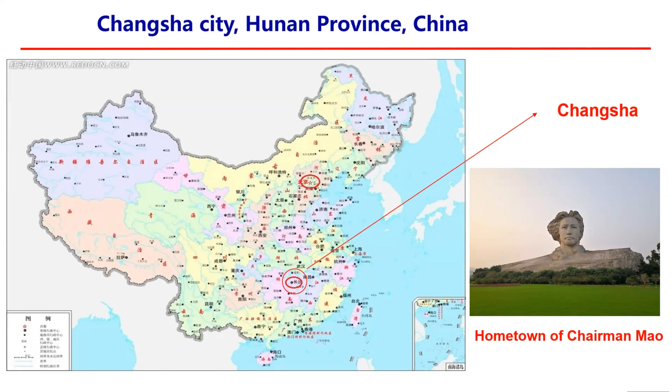I'll give you some quick idea about where I'm from—Changsha and Hunan University. With the direct high-speed train, it's less than 3 hours, so it's very easy to get there. I think some of you have visited Hunan University, and some of my students are here as well.

Hunan University dates back to 976 AD, when the Yuelu Academy was founded. This year we are celebrating the 1050th anniversary of the academy. We have 30 colleges and departments, and one graduate school, with almost 40,000 students now, including 21,000 undergraduate students.

It depends who ranks it, but this year U.S. News ranks Hunan University as number 11 in China and number 19 globally. I think City University of Hong Kong ranks like 60 or 70 or something like that, right?

Then coming to civil engineering, we celebrated the 120th anniversary a few years ago. Several rankings have placed civil engineering at top 5 in China, and we have 10 departments, including one department of building materials.

This is also the ranking from an organization in China that ranks us number 6 in the world and number 5 in China. So you can see we do have a very good research program there.

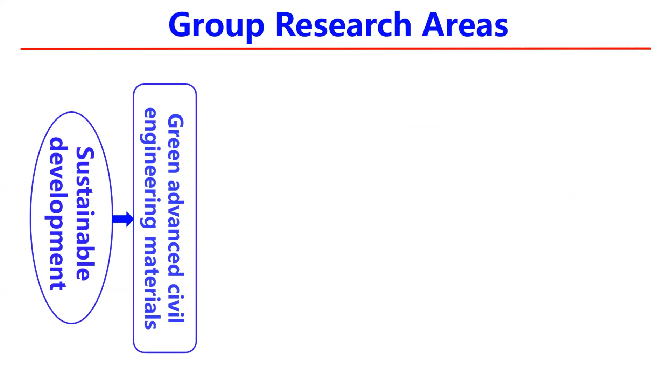For my research group, we mainly focus on 4 areas: how to enhance the performance and also endow functions for civil engineering materials, and also try to develop low environmental load construction materials. Finally, we mainly work with other areas like structure, geotech, or even building physics on how to apply or develop the materials.

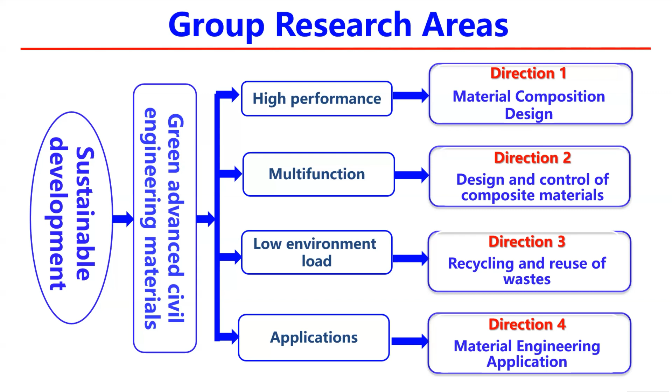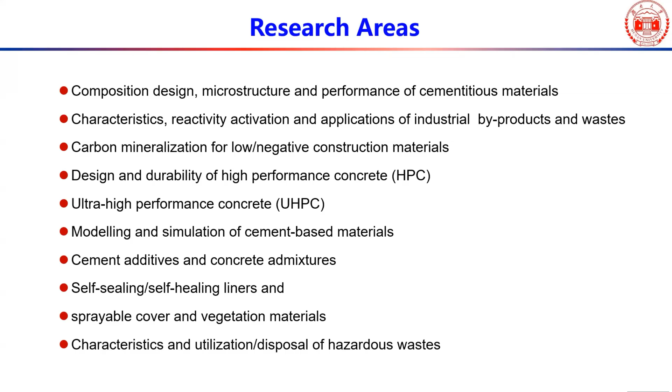This is the research area we are mainly working on currently, including the design, microstructure, and performance of cementitious materials; how to use byproduct waste materials; carbon mineralization; HPC and UHPC; modeling and simulation; cement and concrete admixtures; and self-healing, self-sealing liners, etc. Basically, we cover from organic to inorganic, from micro to macro level, from chemistry to mechanics, and from materials to structure.

Mainly we have been working on several areas. One is the design of high performance or ultra-high performance concrete with multiple performance targets.

Before, when people designed concrete, usually they would read the literature or previous reports, pick a few basic mixtures, and try to optimize or modify them. But on the other hand, if you change some composition or parameters, the mixture will not work. After I moved back from Canada and the US to China, I started to be in charge of one project for the Changsha subway, and I was appointed to be responsible for raw material selection and concrete design for the subway system. So then, should we consider all these requirements or performance targets during the mixture design?

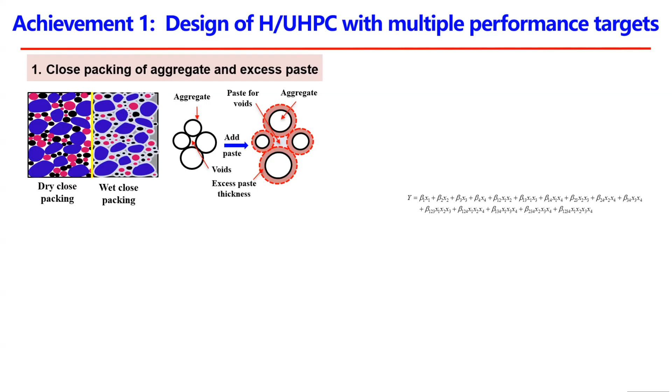So then I started to think about it and came up with this new approach. First, we should try to use closer packing of aggregates, because the majority of deformation or durability problems are caused by cement paste. So we should try to use less cement and have close packing of aggregates. Then, in order to lubricate the aggregates to achieve certain workability or rheology, we have to have some excessive cement paste.

Second, then we come to the binder composition. Before, people just seemed to choose them randomly or based on literature. Here we propose to use factorial design. For example, if the binder consists of four components like cement, fly ash, silica fume, and slag, using this approach we could establish the mathematical relationship between the properties or quantitative microstructure parameters - basically anything that can be quantitatively described - with the composition of the binder.

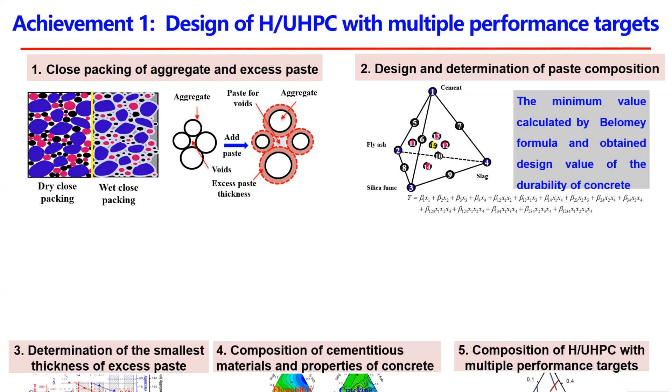Third, based on determining the binder composition and your workability requirement, we try to use chemical admixture to adjust its rheology or workability. Before, if the workability or slump wasn't good enough, people would add more water or change the sand to cement ratio - that's not really a scientific way. Now chemical admixture is well advanced and developed, so we can use superplasticizer to increase workability or reduce water demand, or VMA, viscosity modifying agent, to change its viscosity.

So I'll give you five ternary diagrams here. Because if we have four compositions, you get a contour plane, not a curve. In the majority of cases, we usually use cement, slag, and fly ash, so here I use the ternary diagram as an example. You can see we get the ternary diagram for compressive strength, for workability, for carbonation resistance, for shrinkage, or for alkali reaction expansion, whatever you have.

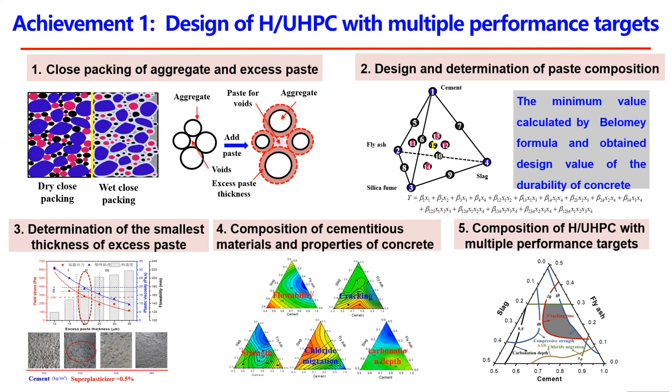So then we stack all these figures, or you can even plot the cost, within the triangle. Then we stack the five triangles together, and you can see gray shadow areas. These gray shadow areas give you the performance or property requirements that meet all the specified numbers. So that's the approach I developed.

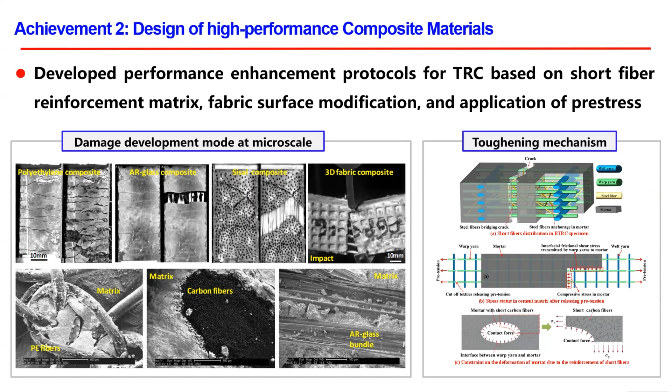We're also working on designing high performance composite materials, and Professor G is mainly working on TRC-based, reinforced cementitious material. Our third area is efficient use of waste material, including carbon mineralization.

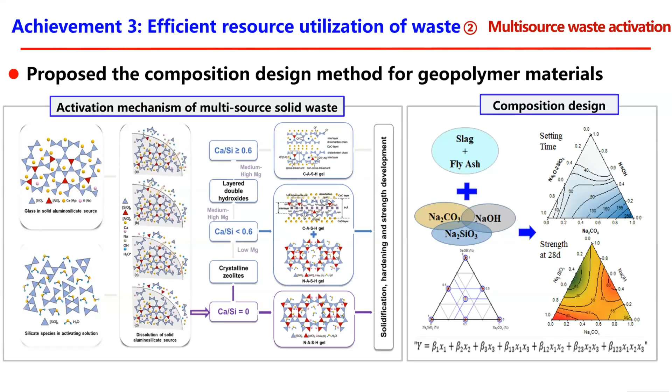I'll talk more detail later, and also the activation of solid waste material. Actually, here in the laboratory we found the relationship between the calcium to silica ratio and the formation of either C-A-S-H or N-A-S-H. We also use chemical activators like sodium carbonate, sodium hydroxide, and sodium silicate to regulate the setting and property development of alkali-activated material. So that's a topic we have been working on.

We have been using our research achievements in applications or construction like the Changsha subway system and also several bridges. I want to mention especially the Thang Long Bridge in Hanoi, Vietnam. They sent delegations to our university several times to learn how to design UHPC and also how to construct the UHPC overlay system. That bridge before carried almost 50% of transportation in and out of Hanoi.

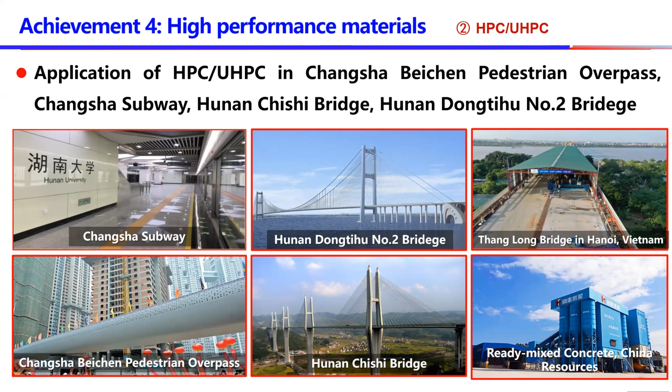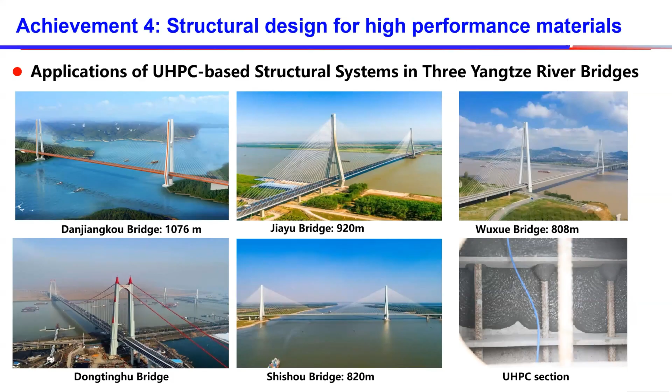We also use this approach for ready-mix concrete companies to help them design concrete mixtures with better performance but even lower cost. As for UHPC, you've probably read some reports - Hunan University has been involved with more than 200 UHPC bridges in China and overseas now.

That's it. We have published over 1,000 papers with more than 90,000 citations, not 80,000. We are also publishing a lot of textbooks and technical books in the materials area.

We have organized 4 international courses with RILEM and also 2 online public courses on civil engineering materials progress and testing methods. We have had over 500,000 audience from all over the world. Probably some of you here also have listened to our online courses.

We have also launched and organized five series of international conferences and two series of domestic conferences on different subjects.

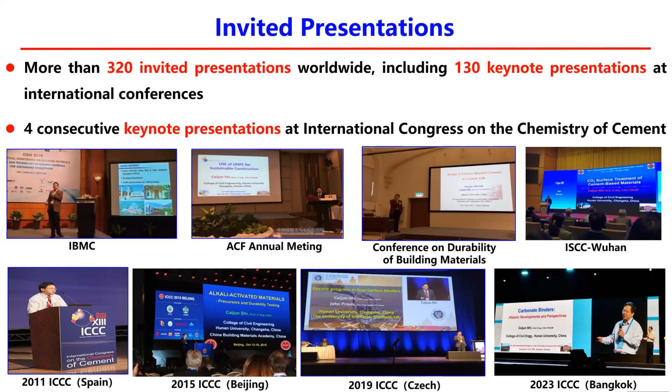We have given a lot of talks all over the world, especially in the cement and concrete area. There is a very famous and the largest conference called the International Congress on the Chemistry of Cement, and I have been invited to give four consecutive keynote lectures. The next one will be in New Delhi, India, and I'm currently preparing the fifth keynote presentation for the Congress.

We also launched a journal for sustainable cement-based materials in 2012, and it has an impact factor of 4.2. It's a traditional journal, so no fee at all. Our rejection rate is about 80 to 95%. So we welcome high quality manuscripts.

Now let me get back to the technical topic, about carbon mineralization.

I would also like to mention our book just released, Carbon Mineralization for Construction Materials and Products, published by CRC Press. If you're interested, you can buy one from the internet. I think this is the first written book of its kind. I was involved in editing two books before, launched by Fernando from Portugal.

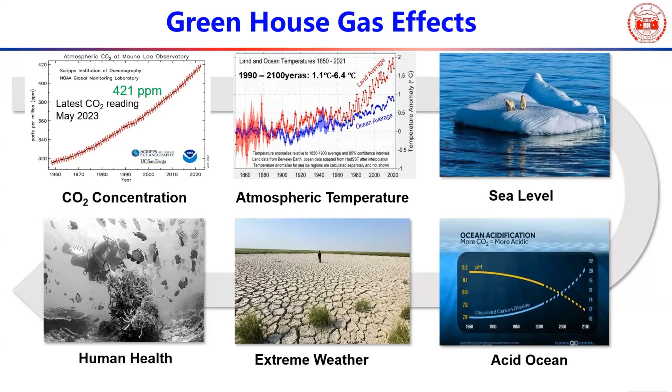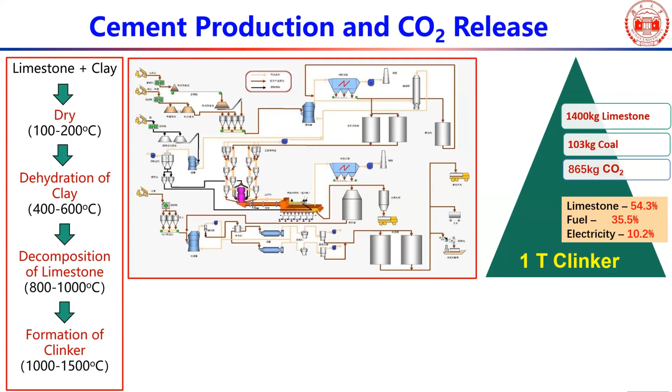So you can see it involves very high temperature, and during the production, it consumes about 1.4 tons of limestone and 100 kilos of coal per ton of clinker, and releases about 860 kilos of CO2 for an advanced conventional cement production line. But now people are trying to use more alternative fuels or waste materials to replace limestone or other raw materials, so the release amount will be less.

If we look at the process in a very simple way, it's mainly due to the reaction between calcium carbonate and silica to form dicalcium silicate plus released CO2, and then dicalcium silicate plus calcium carbonate forming tricalcium silicate and releasing carbon dioxide. Those reactions happen mainly between 1,200 to 1,500 degrees C.

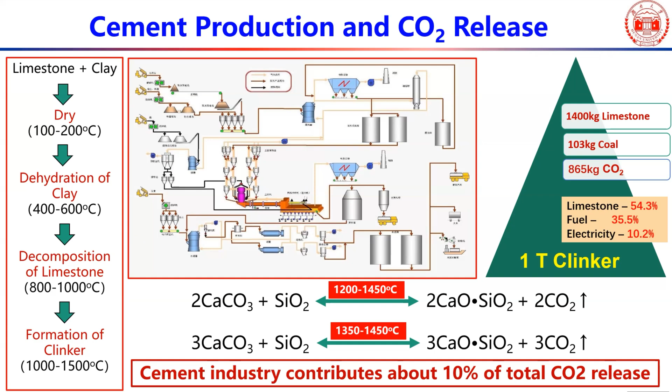Chemically and thermodynamically, the opposite reactions can happen very easily at room temperature and can even release a lot of heat. All conventional concrete is basically made by mixing cement with water to get hardened concrete. So basically we should try to use the reverse of cement production to consume carbon dioxide and get limestone.

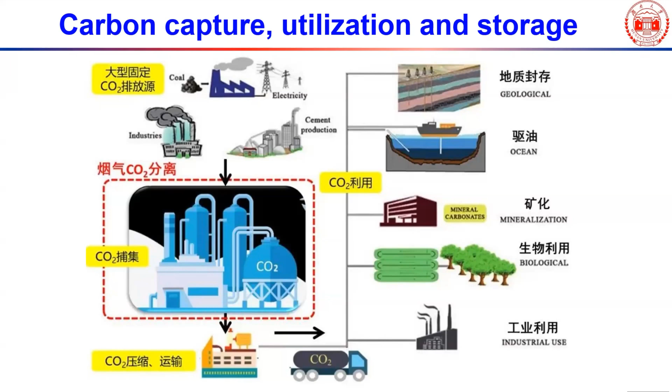I did some information search, and even for a city like Shanghai, it used about 200 or 300,000 tons of CO2 per year. So you can see the industrial or commercial use for CO2 is very, very limited.

As for this topic, at the 15th International Congress on the Chemistry of Cement, held in Prague, I was invited to be in charge of the topic on low carbon binder materials. It covers three topics: alkali activated material, carbonate binder, and belite based binder. I invited a professor to write the part on alkali activated material, and I wrote the carbonate binder part and gave the presentation there.

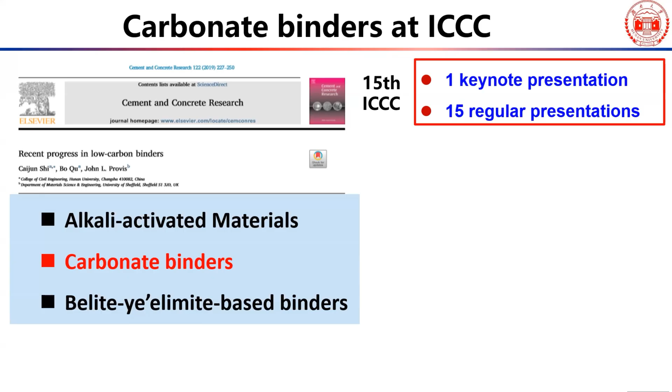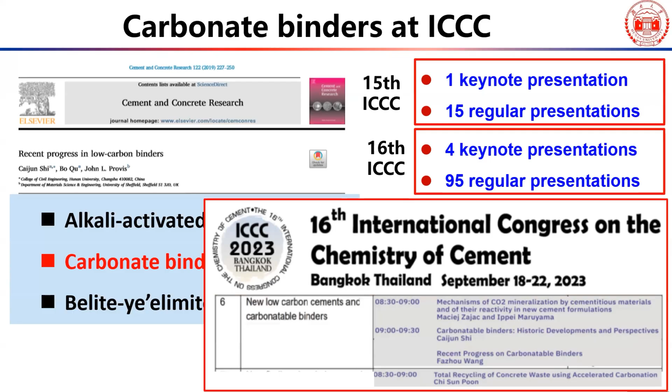At that time, there was only one keynote presentation and 15 regular presentations related to carbon mineralization. But on the other hand, in 2023 at the 16th International Congress on the Chemistry of Cement held in Bangkok, Thailand, there were 4 keynote presentations and 95 out of 500 presentations related to carbon mineralization. So you can see this is really a hot topic in cement and concrete materials area.

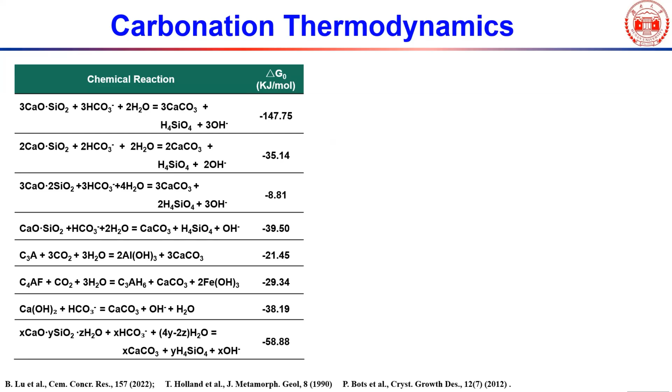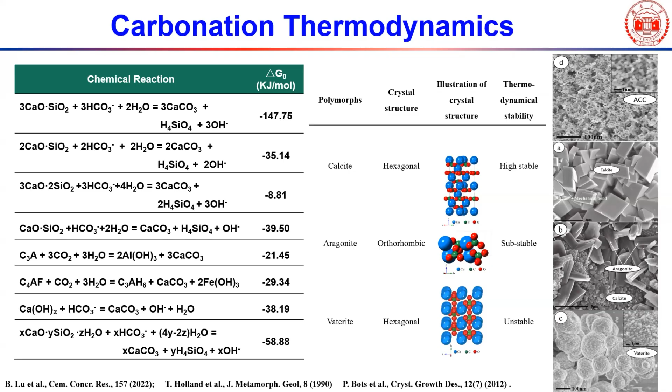When we did some thermodynamic calculation, you can see tricalcium silicate, dicalcium silicate, monocalcium silicate, tricalcium aluminate, and all those hydrated or non-hydrated calcium silicates can be carbonated automatically. During carbonation, we can get four polymorphs of calcium carbonate: amorphous, cubic calcite and prism, aragonite, and also spherical vaterite.

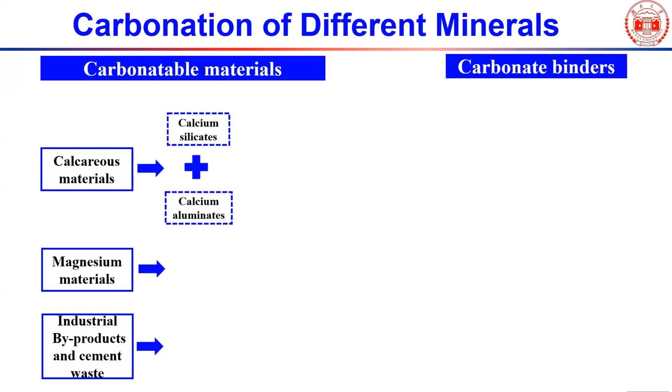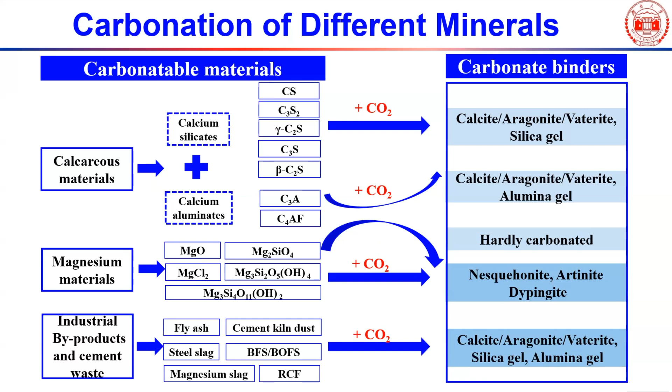So if we divide all those carbonatable raw materials, basically they are calcareous materials: calcium silicates and calcium aluminates, then magnesium-based materials, and also industrial byproducts and waste materials. Basically all of them can be thermodynamically carbonated and then mainly form calcite, aragonite, or vaterite plus silica gel.

Let's look first at how carbon dioxide can react with calcium oxide and calcium hydroxide. Thermodynamically, even under dry conditions, the Gibbs energy for both the carbonation of calcium oxide and calcium hydroxide is very negative, meaning this can happen very easily. But on the other hand, their reaction rate under dry conditions is extremely low.

One other good example is what we see every day: window glass. It's a glassy material, and thermodynamically it's also unstable. But even after hundreds of years, it's not converted to silica. So it's the same like this.

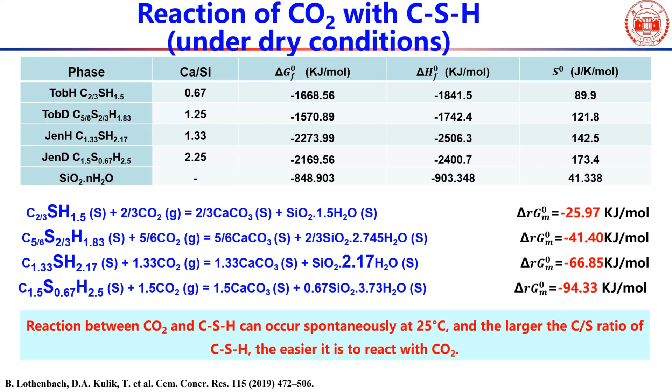And so for those calcium silicate hydrates, you can see their free Gibbs energy is almost between minus 26 to almost minus 95 kilojoules per mole, so they're also very negative. But on the other hand, in dry conditions, they also carbonate very slowly. So this means moisture, or a certain amount of water, is very important, even critical, for fast carbonation or carbon mineralization.

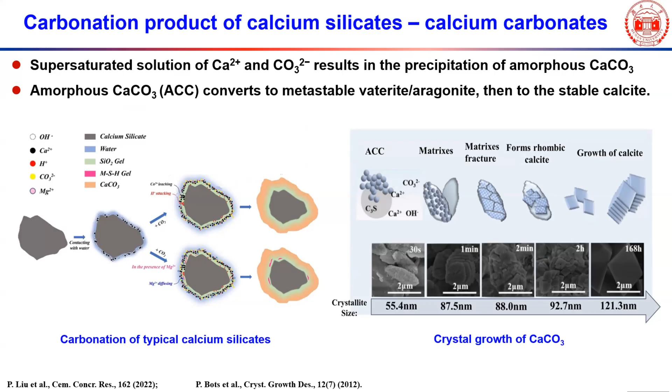Also, even a supersaturated solution of calcium hydroxide, where calcium reacts with carbonate ion, results in the precipitation of amorphous calcium carbonate, even in the presence of moisture. So initially it will form amorphous calcium carbonate, and then with time, the crystal sizes of calcium carbonate start to grow.

As I mentioned earlier, calcium carbonate has three polymorphs. When crystallized, it has cubic forms. If you look at the density, calcite is about 2710, aragonite is 2930, and vaterite is about 2540. So they have very different polymorphs and also different densities.

During their formation, this will significantly affect the properties of the final carbon mineralized product, because the cubic calcium carbonate could have high compressive strength, but on the other hand it's very brittle, just like marble we've seen. Aragonite has a needle structure, and a typical example is seashell, which consists mainly of aragonite, so it also has very good flexural strength and ductility.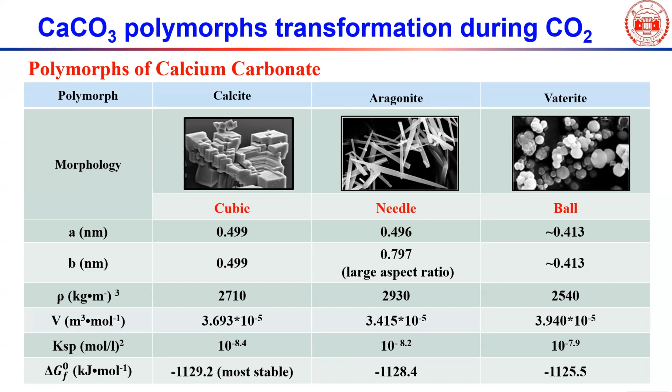Vaterite is very unstable, but on the other hand it has a ball structure, and it may improve the workability of concrete. Especially, it has low density and may increase the compactness, or lower the porosity, of the concrete material.

So how can we really control the formation of different calcium carbonate forms? First, thermodynamically, we established a model, and then tried adding different additives or changing the environment to get different polymorphs of calcium carbonate.

We found that when we add inorganic additives such as metal divalent ions like magnesium and zinc, they can control the formation of calcium carbonate by changing the solubility or crystallization habits of calcium carbonate. We also tried organic additives such as MEA, EDTA, and PAA. They can control the formation by selective adsorption, changing the surface energy to get different polymorphs.

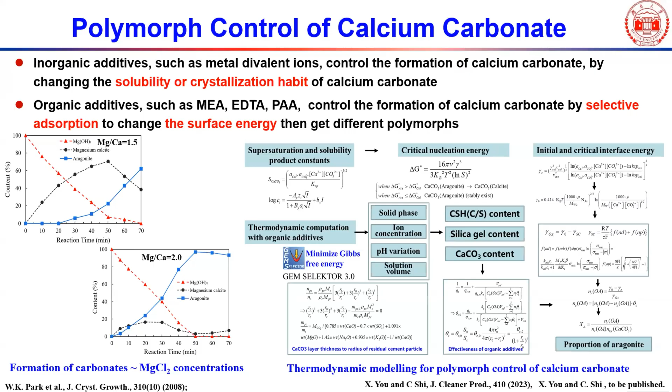So those thermodynamics can really help or guide our research to achieve different results. This is a comparison between our model and published result data, and you can see for magnesium chloride concentration, our model fits the experimental results very well.

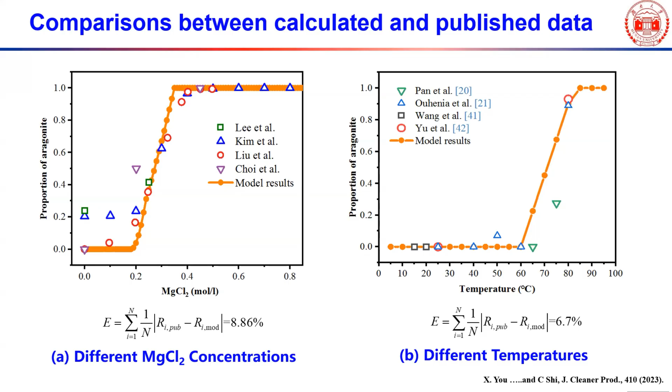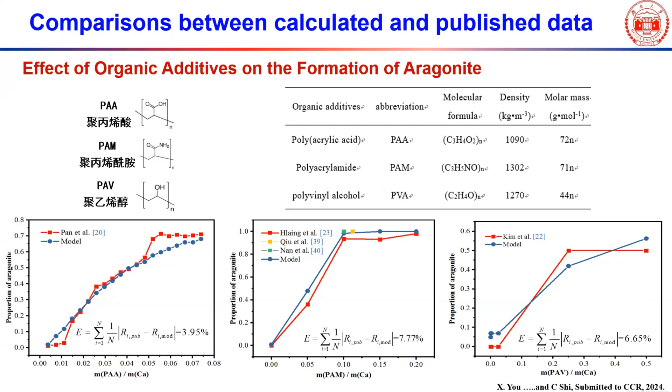As for temperature, you can see from 60 to 80 degrees C, aragonite starts to form, and when it's over 90 degrees C, you will mainly get aragonite instead of calcite. And when we use different organic additives such as PAA, PAM, and PAV, you can see our model also fits the experimental results very well.

We also tried to understand the carbon mineralization of magnesium silicates. Quite a lot of work has been done and published by geologic researchers. Initially, they tried to mineralize carbon through the reaction between carbon and olivine, and also other materials like basalt. But on the other hand, mineralization using those materials requires very high pressure and very high temperature.

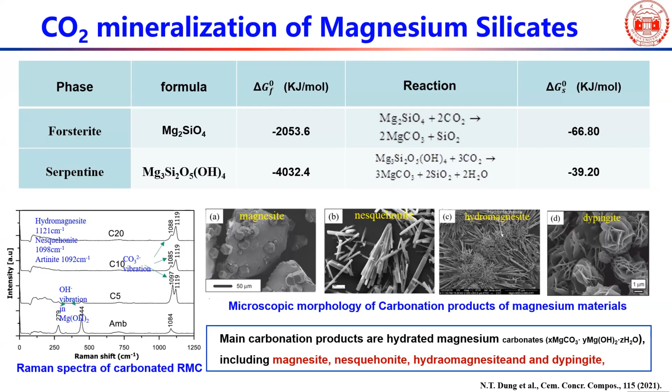There are some processes that can basically convert magnesium silicates to magnesium oxide, so then they can be carbonated very quickly. Magnesium silicate and magnesium silicate hydrate also have very negative free energy for carbonation, but on the other hand, they cannot easily be carbonated at room temperature.

Now let's also look at the historic development of carbon mineralization technology. When I started this project in 2002-2003, I did a patent search, and found that even in 1870 and 1872, the first two patents were granted to James Rowland, who tried to use carbon dioxide to accelerate the setting and hardening of concrete blocks and other products.

Then I did more detailed research, and found that in 1972, some researchers at UIUC did some carbonation work with calcium silicates, including tricalcium silicate, beta dicalcium silicate, and also gamma dicalcium silicate.

But they did not try to produce any products. Then in the 90s, quite a few companies in Europe tried to use carbon mineralization technology to accelerate the hardening of cement particleboard. But at that time, chemical admixtures were not well developed, so producing cement particleboard needed a long time for setting and also large space for initial curing and stockpile. On the other hand, they found that although the surface of concrete can react with CO2 very quickly, the reactions happen mainly at the surface and cannot go inside.

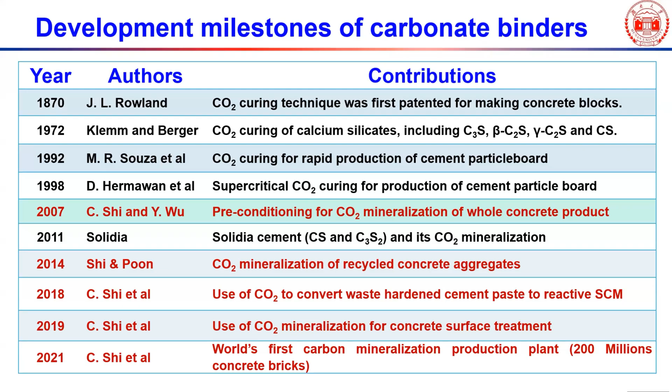Now let's have a look at carbon mineralization of basically calcium-based material. This is our concrete mixing: basically cement, aggregates, supplementary cementitious material, water, and a chemical admixture.

Mainly we can see two types of concrete. One is highly flowable concrete for either ready mix or in-situ casting products, like the top picture. The other one is dry mixture, mainly for masonry bricks, blocks, and also some other products like paving stone. Initially when I started working on this project, I thought, well, block looks very porous and rough, so I thought CO2 can go inside very easily, but actually it doesn't.

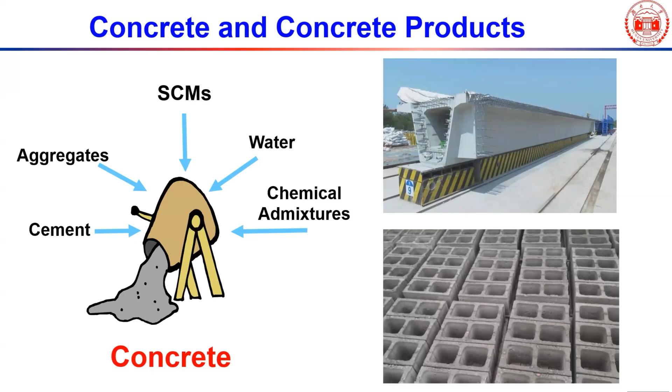In order to get the whole piece compacted, products have to use proper water-to-cement ratio and compaction pressure to ensure all the voids within the product are filled with water. Only then can you get a whole piece of product, otherwise it will fall apart. So in that case, CO2 can still not go inside.

So after the molding or compaction, how can we really remove the moisture in those capillary pores? Because without moisture, it's a very porous mixture, so in that way we can let CO2 go inside very quickly.

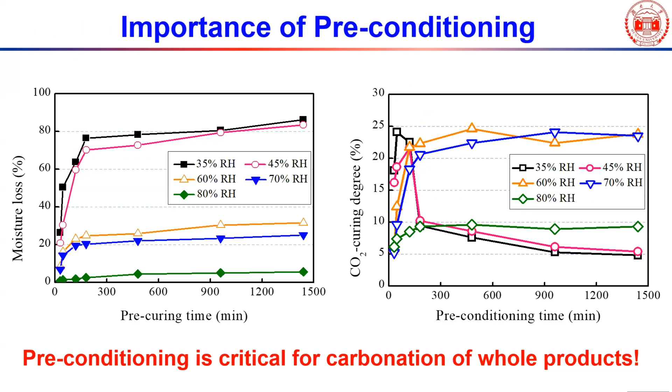Because if you really measure the carbonation degree within 15 minutes, the carbonation degree is also relatively not that high.

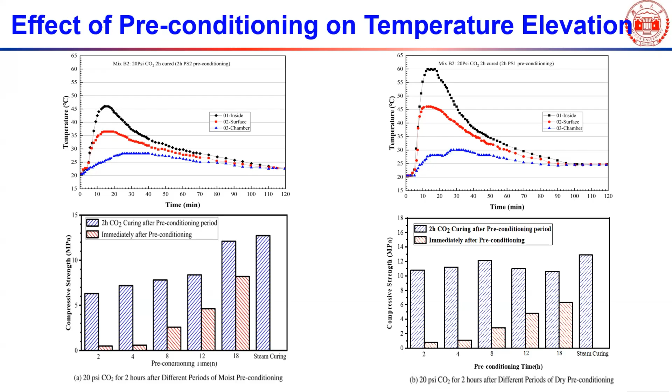So you can see preconditioning is very critical to reach high strength and also high carbon mineralization degree. One thing here, I haven't published this result yet, but as I said earlier, in our experiment, we found removing about 20% of moisture gives the best results.

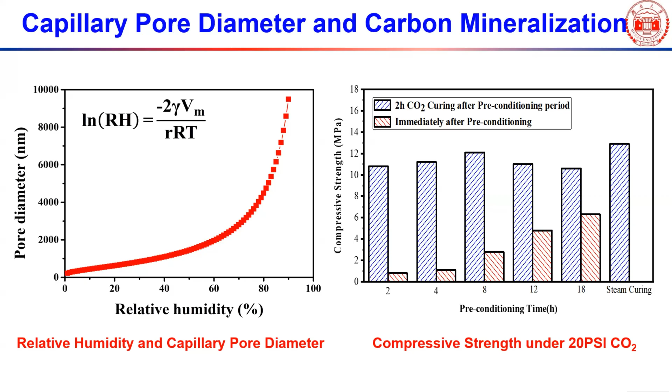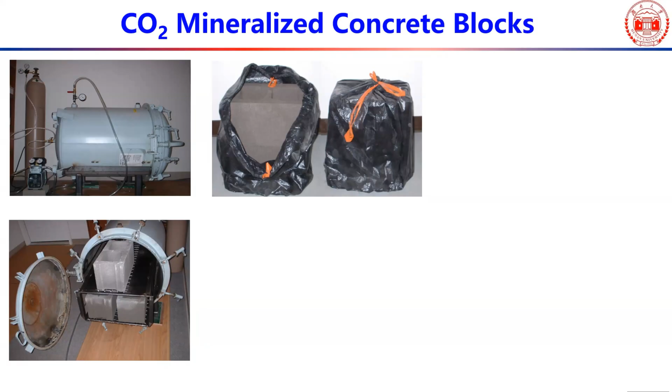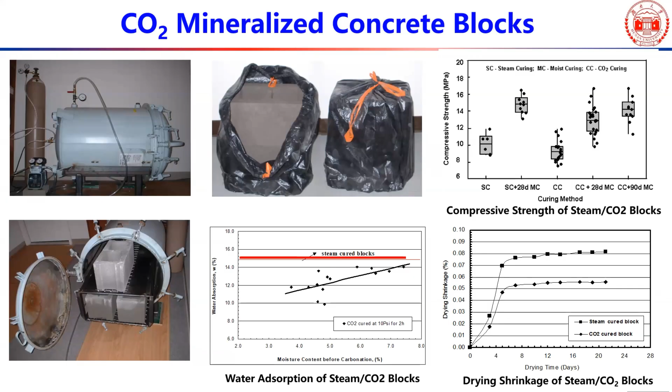But on the other hand, if we look at the drying shrinkage - this is steam cured, and this is carbon mineralized block - you can see carbon mineralized block gives lower shrinkage than the steam cured blocks.

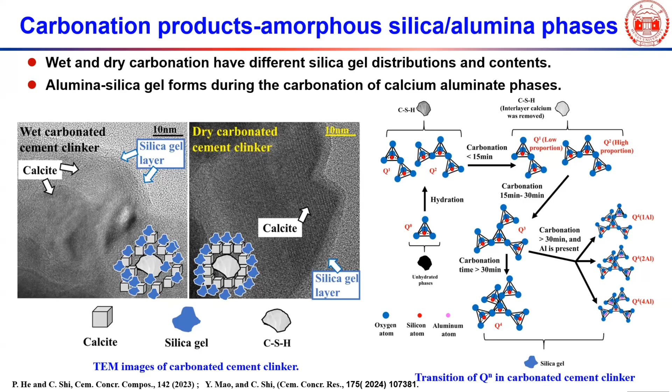So you can see here, in cement clinker you mainly have mono silica gel, basically Q0, Q1, but then after initial carbonation you will get some Q2, Q3, and as the carbonation time increases, you will get a much more polymerized silica gel. This is why I said it's very important for later on, how are we going to use this carbon mineralized product.

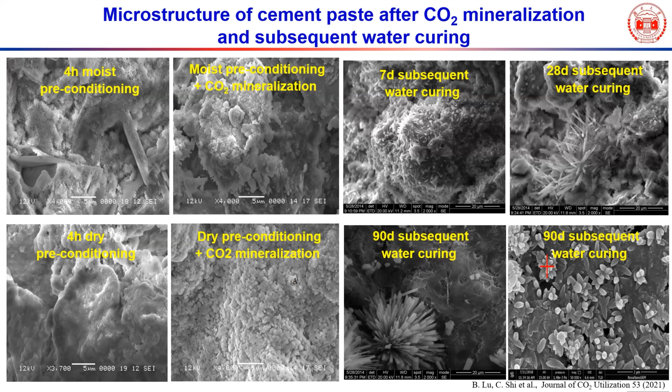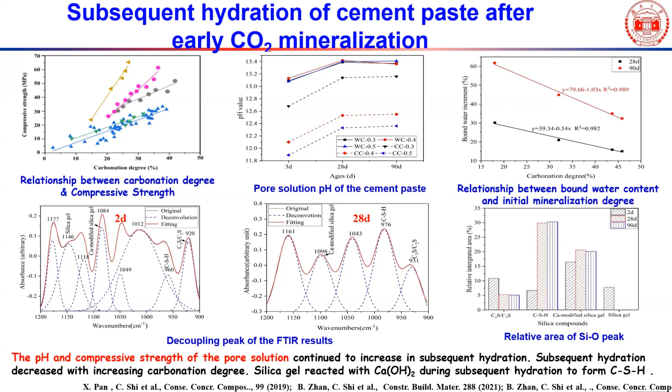On the other hand, after carbon mineralization, initially we can find silica gel forming, but as we immerse the specimen in water, the silica gel later disappears. This is because cement hydration releases calcium hydroxide, which reacts with the silica gel to form calcium silicate hydrate, similar to conventional portland cement.

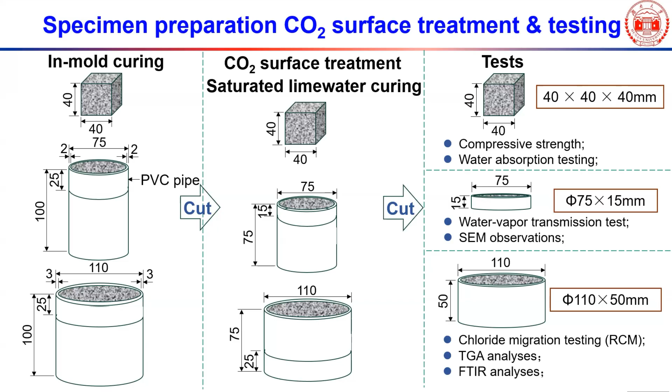I also want to show results on how we use carbonation for surface treatment of concrete products. We cast cubes and cylinders, then used CO2 surface treatment, followed by strength testing, water absorption testing, and chloride migration testing.

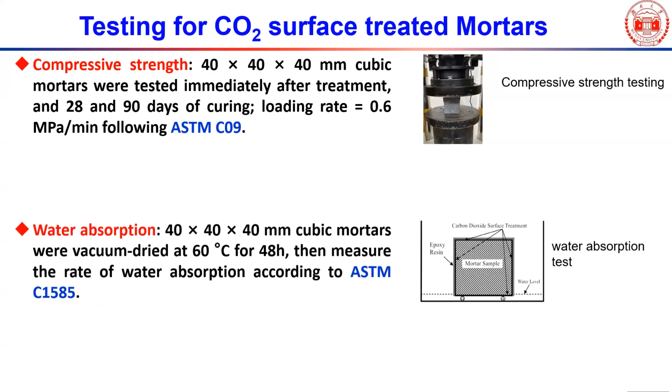Strength testing followed ASTM C109, water absorption testing followed ASTM C1585, and we also did water vapor transmission tests. These figures show quite a lot of interesting results.

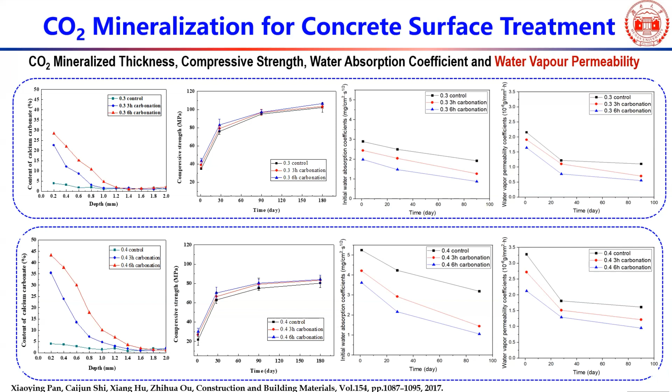The next one, water vapor permeability, also shows similar results. And this is the cylinder we used for the chloride migration coefficient test. You can see that after 6 hours of carbonation, the chloride migration coefficient decreases more than 50%.

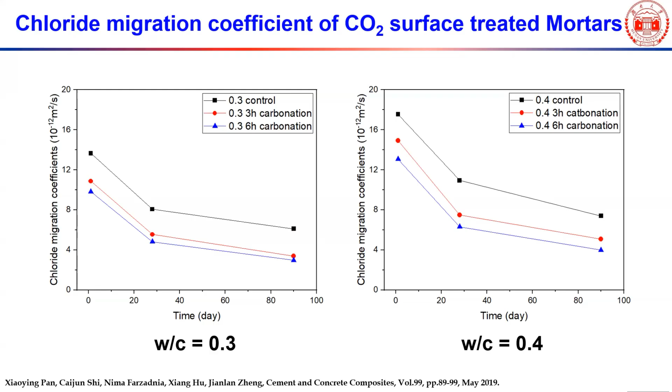This means initial surface carbonation is a really excellent method to produce an integrated impermeable surface. In many cases people use coating to coat the concrete surface. For inorganic coating, after a certain period of time it may peel off, and for organic coating it will deteriorate and also peel off. But this becomes a part of the concrete product itself, so it's very reliable for a long time.

If we combine conventional Portland cement with solid carbonation technology, we think we should use low calcium clinker, but the mineral should be beta dicalcium silicate, because beta dicalcium silicate can be carbonated very quickly and easily. On the other hand, it also has low hydration properties, because later on, after carbonation, it will continue to hydrate and enhance the property rather than like Portland cement, where once carbonation is finished it reaches a peak and starts going down.

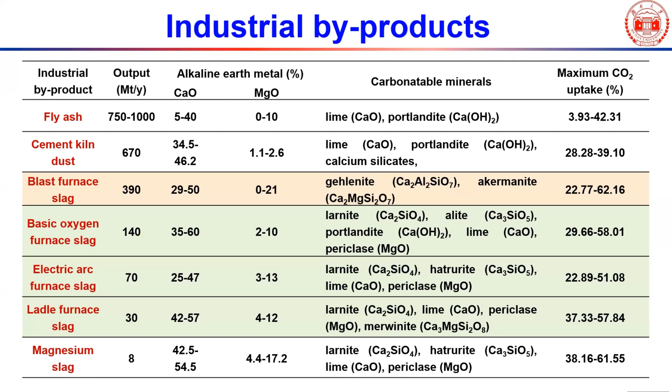Okay. Well, initially we did some work and it didn't work, so I put it aside. But recently, some paper from Tongji University, Zhengwu Jiang's group...

The first graph shows how the calcium to silica ratio affects carbon mineralization. You can see if the calcium to silica ratio is very low, the carbon uptake is also low. But if you increase the calcium to silica ratio, the carbon uptake increases.

On the other hand, those are glass materials. If you compare this calcium to silica ratio 1 glass with the bottom figure, which is actual wollastonite - a crystallized calcium to silica ratio 1 calcium silicate - you can see the carbon dioxide uptake becomes higher.

Actually, the other very interesting result is aluminum. You can see the first figure is CA0.1S, and this last figure contains more aluminum. You can see here the carbon uptake becomes very, very low.

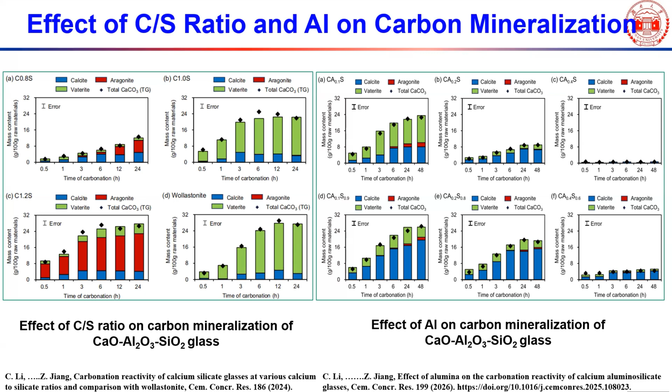Chemically, they explain that without aluminum, the slag will be uniformly dissolved, so the calcium ions can react with carbon to form calcium carbonate uniformly on the surface. But if aluminum exists, the surface cannot be uniformly dissolved, so it dissolves in big chunks, and only a small amount of calcium ions dissolve into solution to react with carbon dioxide to form calcium carbonate. But those are very rough mechanisms.

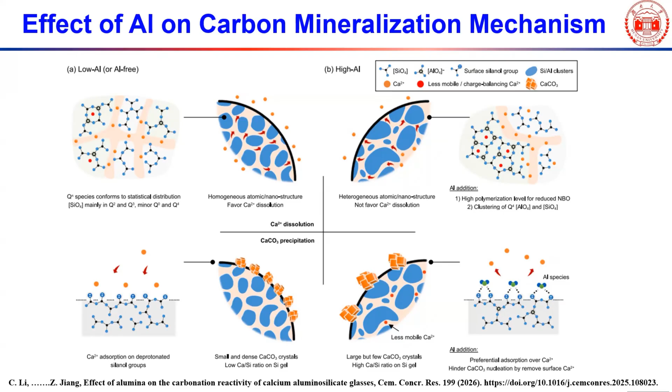I think there's still a lot of scientific study needed to really understand the mechanism here. Actually, my students also did quite a bit of work on this topic.

This is really, really interesting, and we're also working on that. I think it's a good topic to try to understand, because it involves blast furnace slag and other glassy materials - whether they can really be used for carbon mineralization purposes, or how we can improve the carbonation efficiency scientifically. Okay, so that's it.

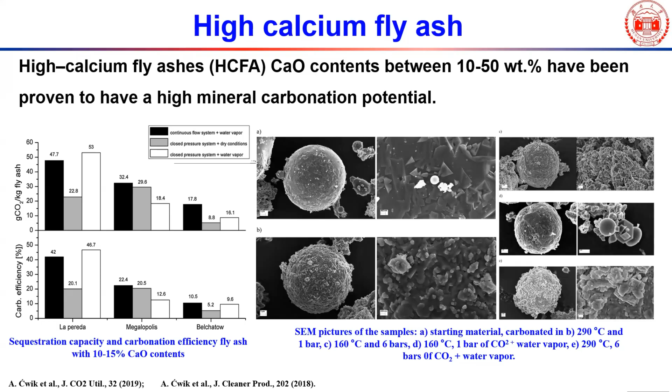The other exception is steel slag. Steel slag is not what we call slow cooled - usually they cool it by pouring the slag onto the ground, or now some Chinese companies developed a process where they pour it into a big steel pan, let it cool slowly, and spray some more water on it, so the big chunk breaks into small pieces.

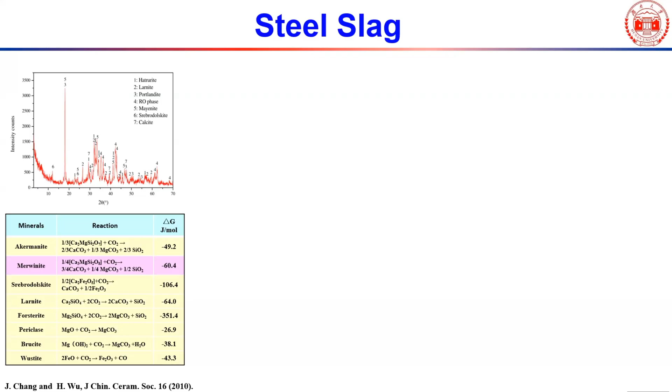Those work are from my friend Professor Caijun, who is now a professor at Hunan University. He studied how particle size, CO2 concentration, and temperature affect carbonation, and he tried to directly carbonate it to make steel slag products. You can see the strength he got is about 40 megapascal.

Recently I also have been collecting quite a bit of information, and probably later this year I will give a talk on how we can really use carbon mineralization technology efficiently. Because, let me see.

Now a lot of people try to carbonate steel slag to make lightweight aggregates. But steel slag has a density of about 3.8 or 3.9, while limestone or regular coarse aggregate has a density of about 2.6. So you'd be using such a heavy material to make lightweight aggregate.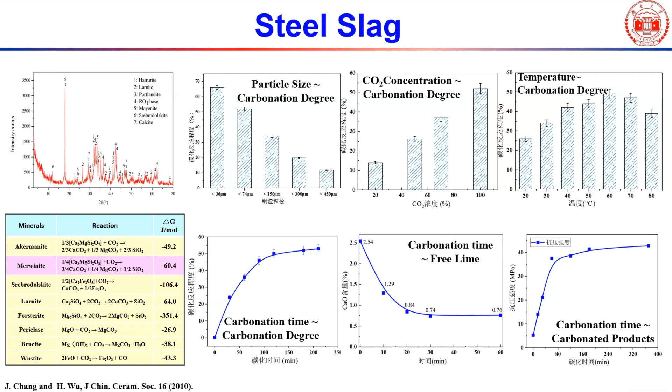One of my PhD students has been working on his thesis for 7 years. When we started working on steel slag, there were only a few papers on this topic, but now probably thousands. He got some very good results - we used some chemical admixture to enhance the carbonation, and we achieved a strength of 60 to 70 megapascals, making carbonated steel slag product directly rather than carbonating it to become a supplemental cementitious material.

So the other material is recycled concrete fine. Actually, I just recently had a PhD student graduate - now he's a postdoc at Imperial College. Within 2.5 years he published three CCR, three CCC, and several other journal papers on this topic. This project was supported by the Global Cement and Concrete Association.

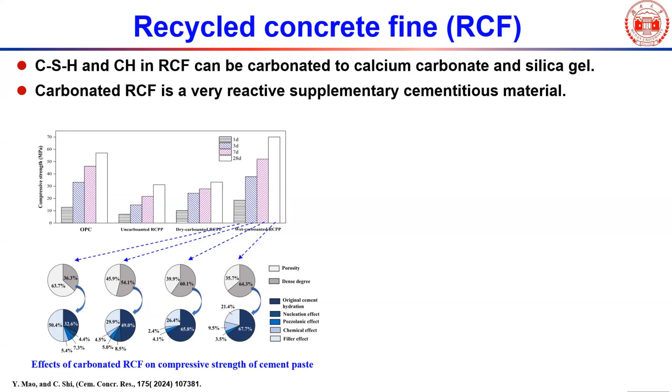Part of his interesting work is he quantitatively calculated the different effects of carbonated recycled concrete fine as a supplemental cementitious material, including the filler effect, pozzolanic effect, and a few other effects - he calculated 4 or 5 effects total, and how they contribute to strength. This was published in CCR.

The other process was actually developed by Maruyama from Tokyo University. They use a container filled with recycled concrete aggregate. They pump calcium hydroxide solution and also CO2 in here, and this carbonates the recycled aggregate.

So that's their process. Actually, we had two master students working on this - I said, why don't we just compact the recycled concrete fine to make a product directly? You can see here, after a few hours of carbonation, it reached very high strength.

And even the carbonation degree was very high. You can see here, after a couple of days of carbonation, it reached almost 70% carbonation degree and strength over 40 megapascals. That's strong enough to make a lot of construction products, right?

This paper was recently published in CCC, though I don't know why it's not showing up here - I can't see this on the screen. I think the publication information was just released, last issue.

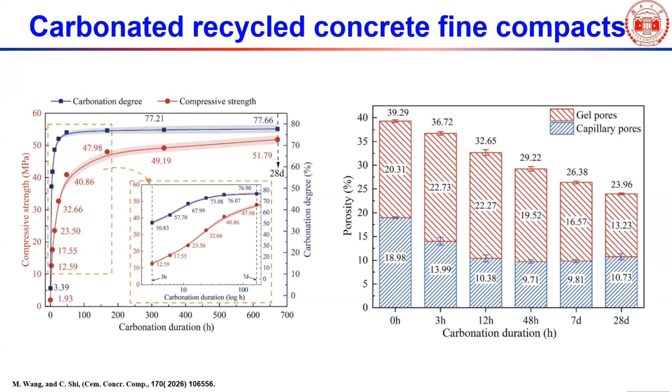So also some technology demonstration applications. For our preconditioning technology and carbon mineralization, after almost 20 years of laboratory research, we worked with Huaxin Cement Company in China. We built the world's first carbon mineralization concrete brick production line. This plant produces 200 million pieces of concrete bricks per year.

The other amazing thing is we use cement flue gas, not pure CO2, because when you capture and purify CO2, it costs about 600 or 800 RMB per ton. Here, it also can purify the flue gas - we haven't measured this precisely, but on the other hand...

We do not use any pressure - basically flue gas flows through. You can see inside there are so many bricks stockpiled, and the flue gas goes through. Definitely some particles hitting the bricks will precipitate, and that's the basic physics.

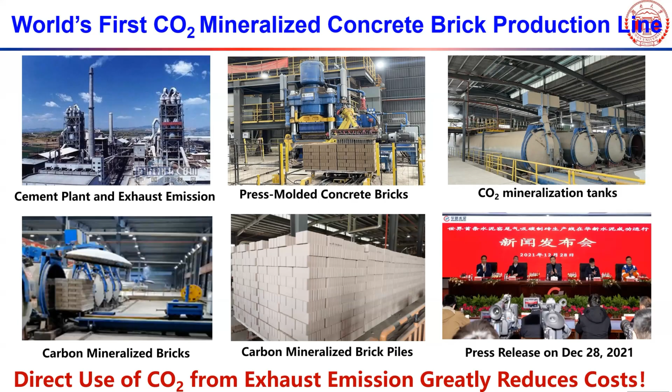Our university cannot really handle the international contract, so I got stuck by several projects here. Anyway, I think we will move forward with this, especially with this production line, we have collected a lot of information and data for many other different applications.

During the past several years, we measured the carbonation depths. The thickness of the brick is 50 millimeters, so half is about 25 millimeters. You can see the majority of them reached on average about 20 millimeters. The strength is about average 17 megapascal, and the Chinese standard requires minimum 15 megapascal.

We also stockpiled several bricks, outdoor and indoor, and you can see the strength of the brick continues to increase. This plant basically consumes about 52,000 tons of CO2 per year. On the other hand, it originally used high temperature steam autoclave, so we can save those steam for autoclaving, which is equivalent to 8 million kilowatt electricity.

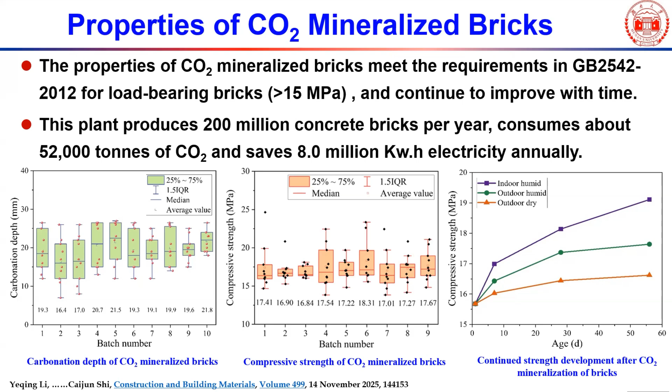So it shows very significant environmental and technical advantage for this technology. We have had several certified testing reports, and those bricks have been used for a variety of projects, and they work very well.

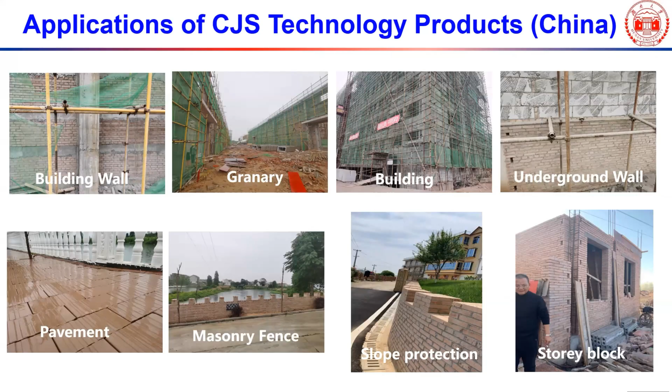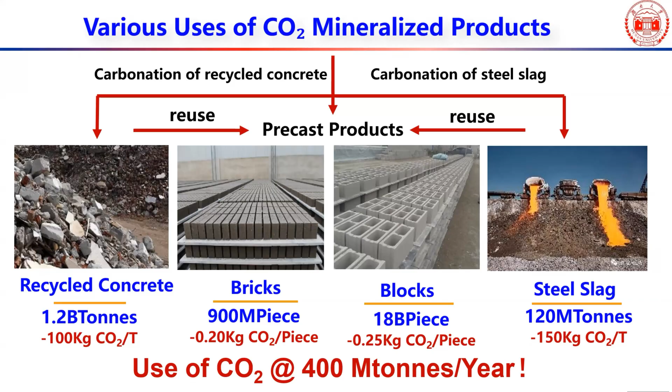This is the estimation done a couple of years ago, based on recycled concrete, bricks, blocks, and steel slag available, and we estimate it could consume about 400 million tons of CO2 per year. You can see it's really, really effective technology to mineralize the carbon dioxide and also produce good products.

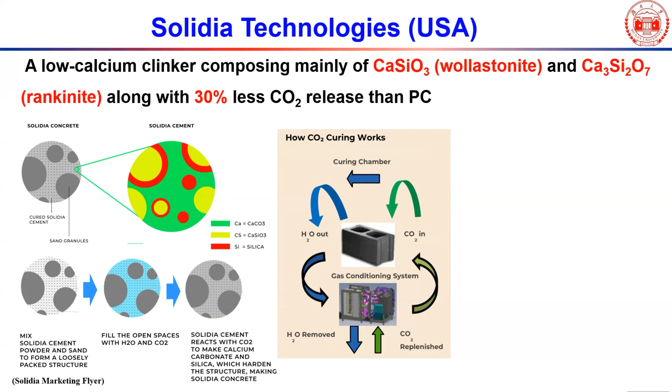This is basically Solidia technology, and as I said, Solidia cement mainly using tricalcium disilicate, and then basically use our preconditioning process to make blocks. The advantage is the calcium to silica ratio is low, and the calcining temperature or production temperature is also lower than conventional cement.

But on the other hand, for conventional cement, because it's well established technology, its production cost is very, very low. You can't imagine, in China the production cost is only about 100 to 120 yuan per ton of clinker, and relatively the quality is very uniform. But for those special clinkers, it still takes time and effort to really produce consistent products.

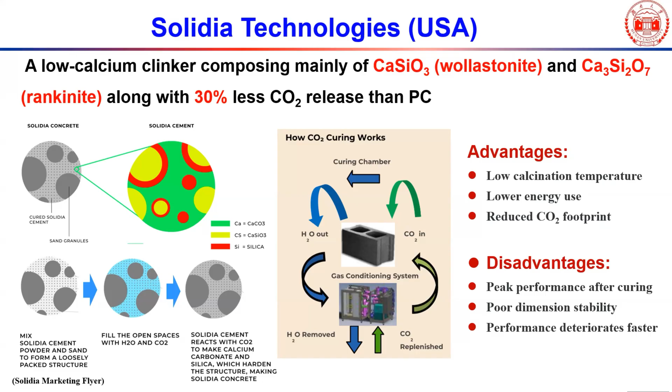But of course the disadvantage is, once the carbonation is finished and the performance reaches peak, then it starts to deteriorate, and also has poor dimensional stability, and of course the performance will deteriorate fast.

I don't really see the scientific advantage from this mixture or from this portion, because the gamma dicalcium silicate, as I said, once the carbonation is finished, it does not have the potential for further hydration.

And coal-fired thermal fly ash, if it's low calcium ash, it basically acts as a filler, and cement is regular cement. Anyway, they are marketing this technology and they have also done quite a lot of demonstration.

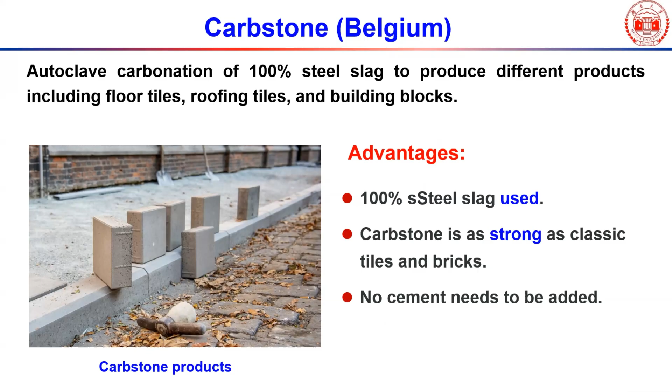This is Belgium's Carbstone. Basically they use 100% steel slag, to carbonate to produce different products. That's what I said - yes, technically it's efficient, but on the other hand, we can probably still do more work on this.

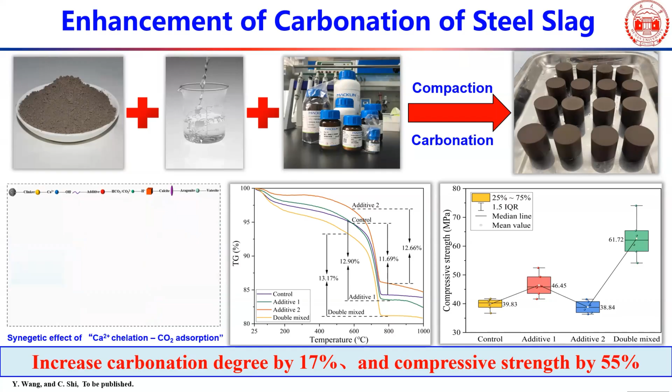Sorry, I put this slide here. You can see here we use some chelate and also some carbonation enhancement additive, and you can see here the strength. Typically we can get only about 40 megapascal, but here we got 60, 70 megapascal strength. With such a high strength, I think we can have much broader applications for this technology.

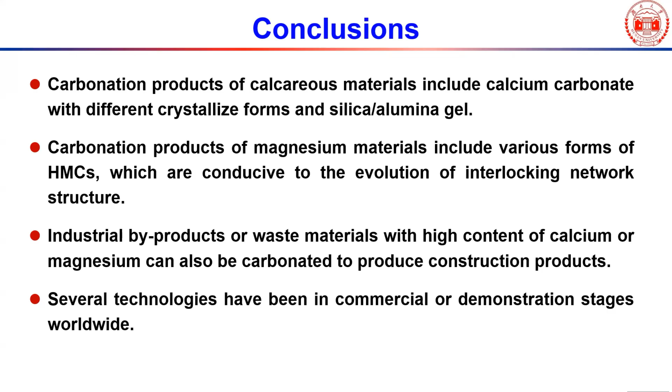So as you can see, carbon mineralization can be a very good efficient technology for carbon dioxide utilization. On the other hand, because the process is very complicated, it involves a lot of physical and chemical processes, you have to really understand the certain sciences and obey some fundamental concepts, then you can get really good results. Of course, still a lot of work needs to be done to widely use this technology.